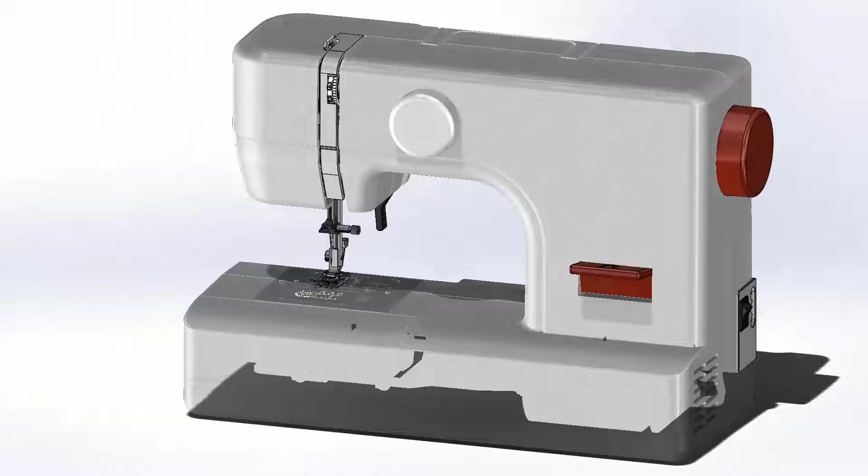This sewing machine has dozens of moving parts that all need to work together perfectly to get good results and ensure reliability. Let's see how the new enhancements to SOLIDWORKS Simulation 2023 can gain deep insight into some of these complex mechanical systems.

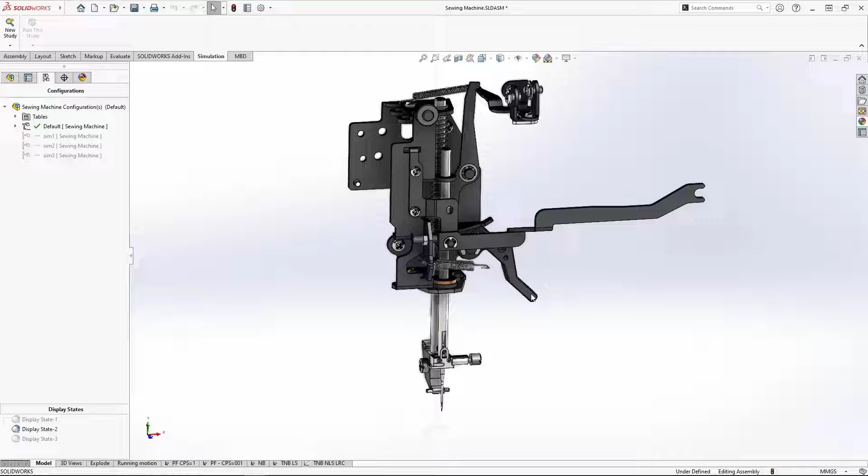When zooming in on the presser foot assembly, we see that this handle uses a cam and follower design to raise the foot away from the fabric. The follower is held in place by a strong spring that holds the fabric down while sewing. We want to make sure that the spring is strong enough to keep enough pressure on the fabric, but not too strong, making it difficult to raise the lever. We'll need to test multiple spring stiffnesses until we get it right.

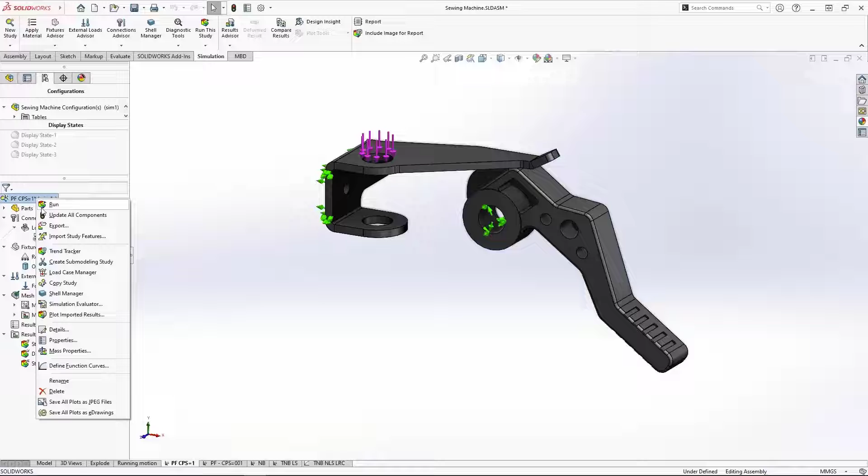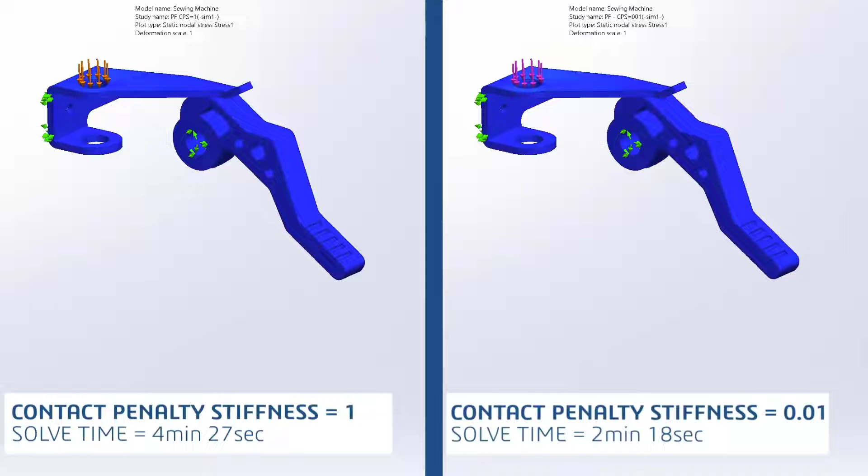Since there's a sliding contact, we could see some long solve times when we run the analysis, but now in SOLIDWORKS Simulation 2023, there's a new adjustment for contact penalty stiffness. This will trade some contact pressure accuracy for faster solve time. This is great for testing out complicated assemblies or running multiple iterations, searching for an optimized design. In this head-to-head comparison, when the contact penalty stiffness is set to its lowest value, this simulation runs significantly faster.

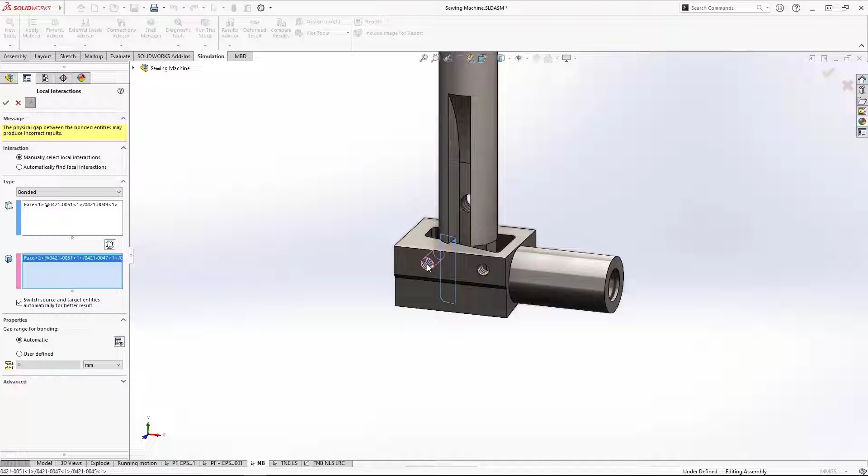Looking at the needle bar assembly, we want to ensure the needle clamp is strong enough to take on the repetitive forces from the needle. To simplify this assembly, we'll remove these set screws from the analysis. New in SOLIDWORKS Simulation 2023, we have more flexibility when creating bonded contacts between non-touching faces at extreme angles to one another, like the threaded holes for these set screws and the flat cutout on the needle bar.

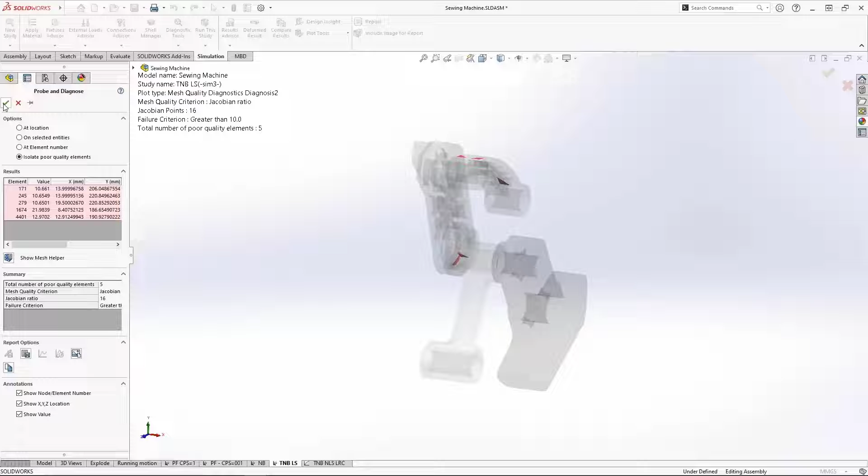The upper shaft assembly has several plastic molded parts with complex geometry which could require some advanced meshing and mesh interrogation. New in the Command Manager is the Diagnostic Tools flyout menu that provides quick access to important tools like mesh quality diagnostics. We quickly detect some poor quality elements that will require mesh refinement to ensure accurate results.

For SOLIDWORKS Simulation Professional users, the Under Constrained Bodies command has been greatly improved. The solver now performs a singular value decomposition, which is much faster than previous versions. We'll also see far more realistic feedback of complex under constrained systems like this thread take-up mechanism.

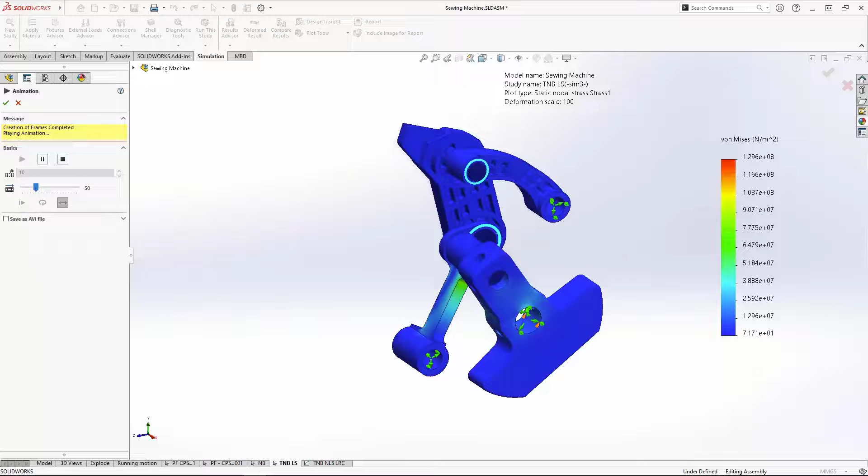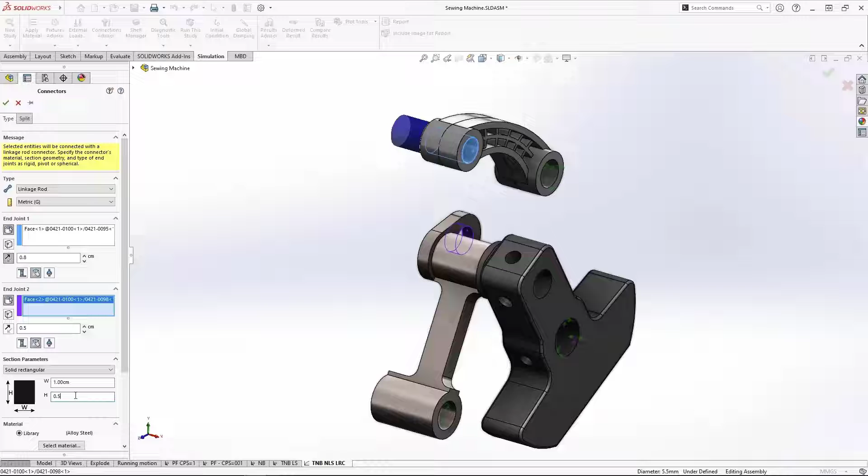And for Sim Premium users, the linkage rod connector, which was introduced last year, is now available for nonlinear static and dynamic studies. It'll work perfectly here to help simplify the analysis and speed up runtime. Changing end conditions, offsetting the link, and dimensioning the rod will replicate its exact function in the analysis.

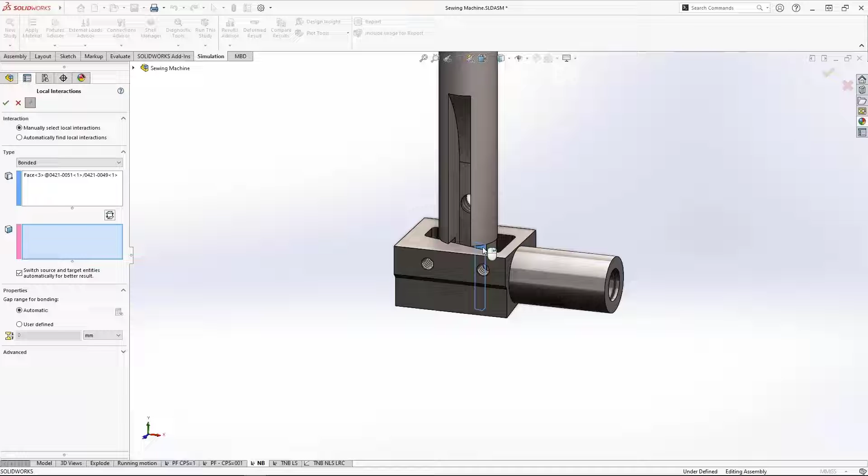SOLIDWORKS Simulation 2023 will speed up the analysis process with new enhancements for every designer. Contact problems will run faster than ever, bonded contacts between non-touching faces are more flexible to use, and enhancements to Simulation Professional and Premium allow for quick investigation of boundary conditions and powerful simplification tools to get your job done fast.